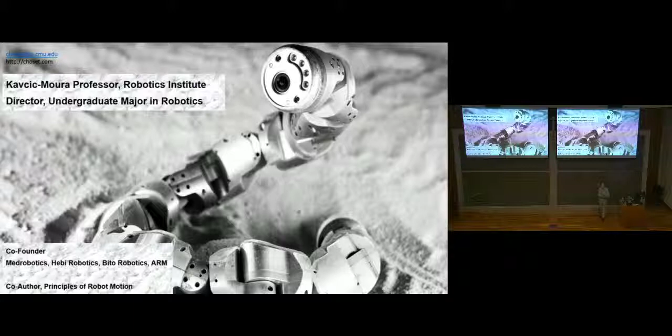It goes without saying that because of my experiences at the University of Pennsylvania, I don't think I'd be here today, and I'm very grateful for the education I received here. I worked in the GRASP lab when it was in two different locations, and through those experiences I'm just very lucky. What's interesting is when I come back to Penn, seeing the new faces, the new people who are here, and there are some wonderful colleagues I've had. So whenever I come back to Penn, it's both a homecoming and an opportunity to see some new people. Thank you again for having me.

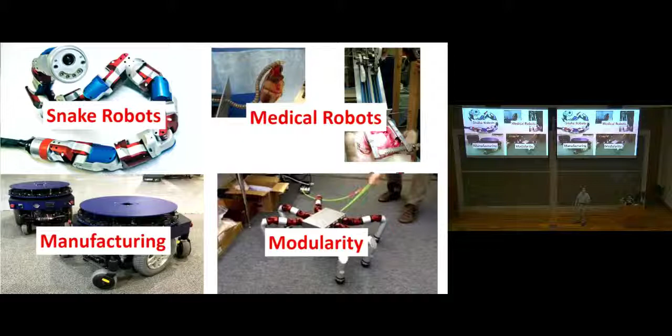My research group, over the last 19 years, has done a variety of things. I think we're famous for these snake robots. We're getting into medical robotics work, and recently some manufacturing as well as issues in modularity, which Mark really set me on that path.

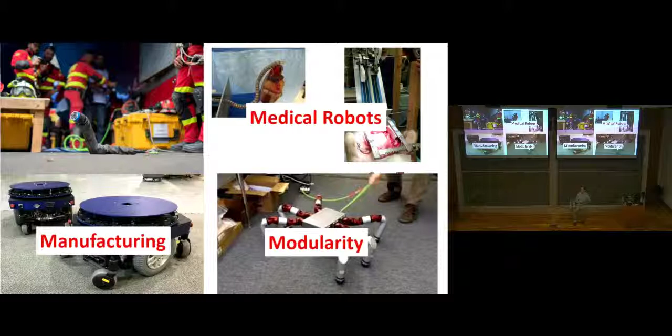What I'm proud of with the work we're doing in all these areas is that we're actually working with some practitioners. For the snake robots, last year we went to Mexico City at the invitation of the Mexican Red Cross and helped clear buildings looking for potential survivors.

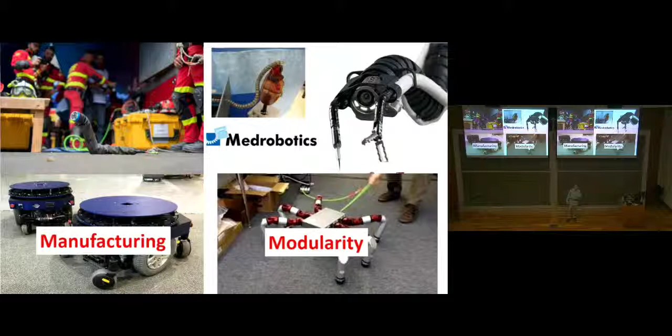In terms of medical work, my students, my collaborators, and I formed a company called Medrobotics that makes this medical snake robot. I should also acknowledge I have another startup making AGVs and technologies to support AGVs, and then there's this other company that makes modular systems. Hebi is the Japanese word for snake, so Hebi Robotics.

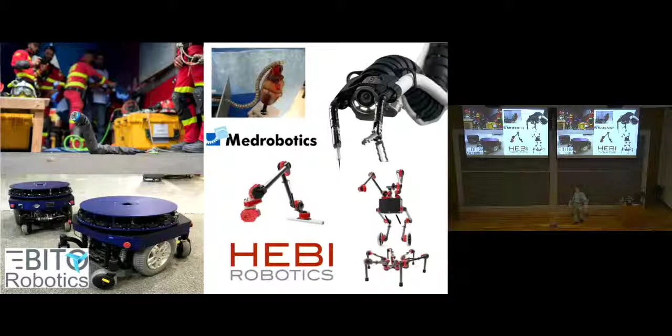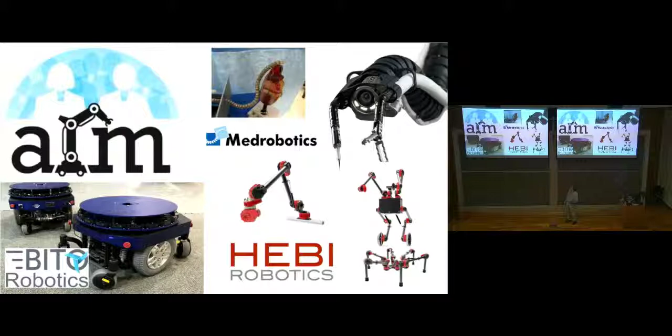And then finally, as Mark pointed out, I was co-PI in putting together the Advanced Robotics for Manufacturing Institute. It's one of 14 manufacturing institutes that President Obama installed, and this one is about a $250 million, five-year endeavor.

The thing is, you don't talk to academics for the applications. You talk to us because of the basic science we develop, and we use the applications to stress test our ideas and make sure we didn't make something up.

Let's start with locomotion for snake robots. Like any good scientist or engineer, you start with Lagrange's equations. If you know what your inputs are, simulating what's going to happen really isn't that hard a problem. It's the reverse that's hard: given you want to go in a certain direction, what should your inputs be? This can be a hard problem for all the reasons of second order nonlinearities, et cetera.

If you make some assumptions—one of them is conservation of momentum, and the other is that if I'm standing here, this is my left, and if I'm standing here, this is still my left—if you make those two assumptions, you can end up with a very simple first order relationship. What I like about this is that we've reduced a complicated problem down to something tractable, something you can play with.

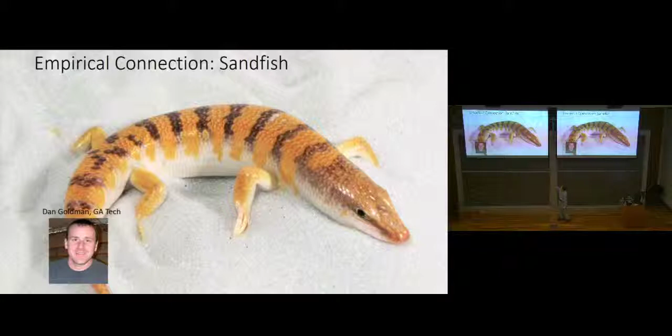And here's where my collaboration with Dan Goldman sort of starts off. So this is a sandfish - it's a little animal that kind of swims in the sand. What's interesting here is that this mechanism, this animal, is interacting with a granular medium. And what we want to do is come up with that relationship, that Jacobian-like relationship, but for a granular media.

And that's something which in the past has been a little bit hard to do. So what we did is we created this robot here.

It has 3 links, and it's in these yellow BBs. And what we were able to do, and this is where the universe was really kind to us, we perturbed for every pair of alphas, for every shape variable, we perturb them, we inject a little bit of velocity into each of these joint angles.

So at a given joint angle, we try one velocity, we try a bigger velocity, and so forth. And after trying this for every combination of velocities and joint angles, we noticed that this linear relationship between our shape variables and our body variables just magically emerges. This is dumb luck. This is the universe being nice to us.

And now what we're able to do is use that linear relationship to derive that Jacobian-like relationship. It's called a connection. And then from there, we can design our 2-dimensional height functions, and we can design our gaits. So in the past, believe it or not, people studied this system—actually Nobel laureates have studied this system.

The best they could figure out was the closest to an optimal system, and that's after days and days of simulations. But with us, within a second, you can see this butterfly shape gives us an optimal step forward.

Here what we're doing is the function you're seeing there—remember that Jacobian has 3 rows, x, y, theta. We're plotting the orientation here, and now we're able to get this robot to orient inside of a granular media. So making it go forward, you didn't need lots of computation.

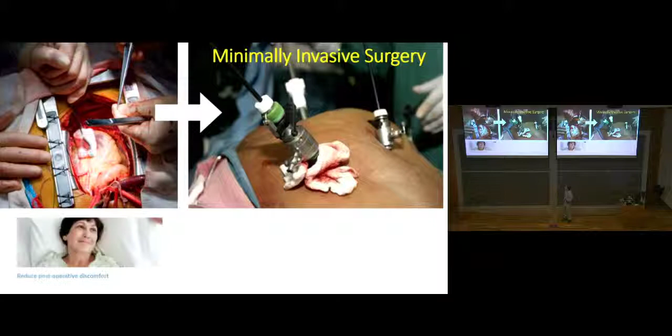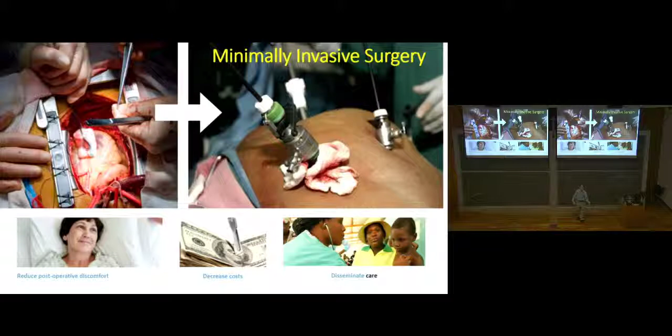It's actually cheaper. And what I'm looking toward now is trying to see how we can have minimally invasive surgery help disseminate medical care and get it out of centers of medical excellence.

The thing with conventional minimally invasive surgical devices is that you're limited to either rigid laparoscopes, so they can only access that which is in line of sight from where the incision is, or you have these flexible endoscopes. They're flexible, but they buckle easily, so you're only limited to the luminal tracts, like your intestines, for example.

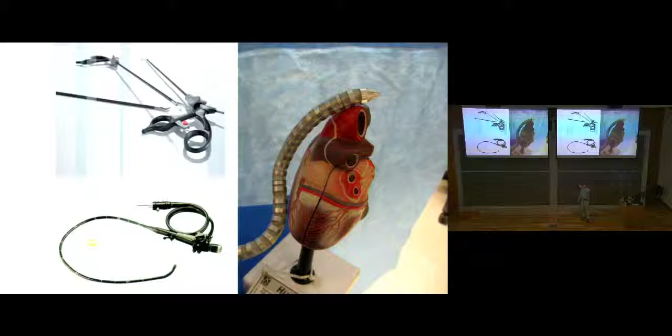What we want to have, or what we have, is this surgical snake robot that inherits the best of both worlds. It's both rigid and flexible, and because of that, you're now able to navigate the cavities, because you can steer your laparoscope wherever you want, or you can ensure your endoscope will get wherever you desire.

So here, this is my clinical collaborator, Marco Zenati. He used to be at Pitt, he's now at Harvard. We're doing minimally invasive surgery on this pig, it's about a 40-kilogram pig. And the idea is we want to do this procedure where we get to the left atrial appendage.

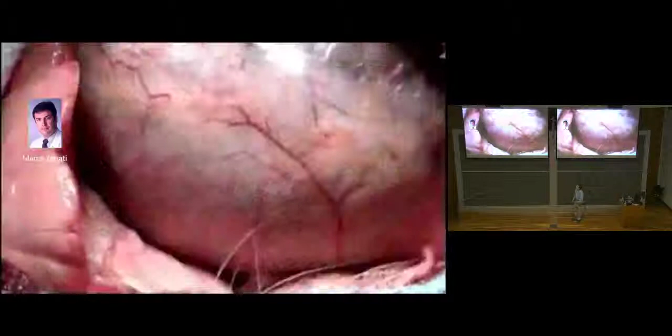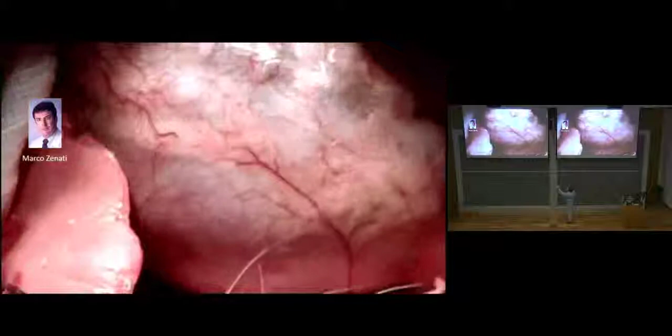By the way, this is not minimally invasive surgery - we just cut it open so you can see what's going on. But you can tell that the snake robot is sailing between the pericardium and the beating heart. Your pericardium is transparent, so here we're seeing through the pericardium to see the snake robot go.

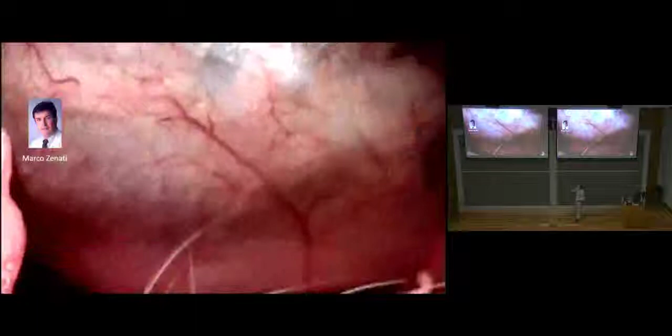So this is nice, but one of the things that Marco and I were able to do was take this technology and really kick it over the fence with the help of one of the economic development organizations in Pittsburgh, and we started a company called Medrobotics. Originally it was called Cardio Robotics, but now it's Medrobotics.

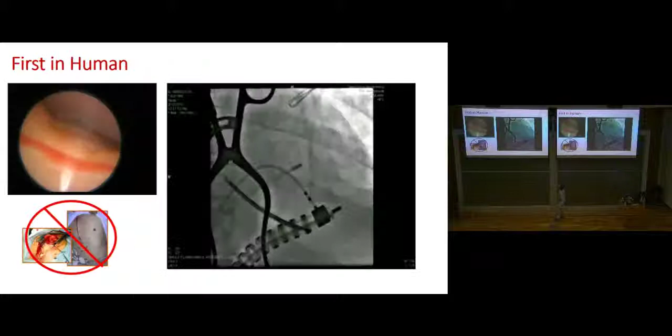And what you see here is a live fluoroscopy of the snake robot wrapping around this woman's heart. This is the view from the catheter, from the vantage point of the robot. So now you see that white - this is white because your lungs are white, except if you smoke, and the pericardium is transparent. So you're looking through the pericardium up into the lungs.

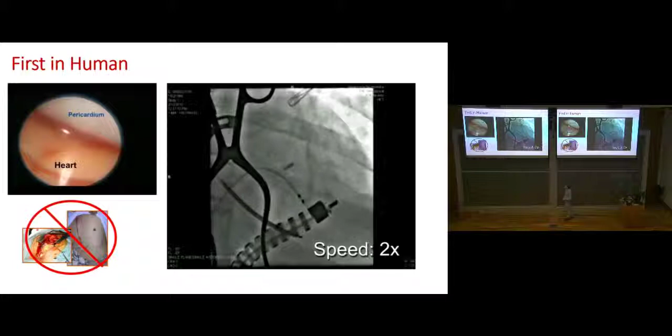And for this procedure, it was a 4.5-hour procedure. And I'm proud to say that the woman who had this, she went home from the hospital the next day. And she didn't have this sternotomy, this full cut. If she'd had that sternotomy, she would have been in the hospital for 14 days, okay?

What's funny is after the operation, I flew back to New York, I called up Marco, and I said, hey, it was a success. And the first thing he asked me was, did the patient live? And I just couldn't get that - I was like, of course the patient lived. I wouldn't be excited for one thing, but...

These aren't experiments - you really have to go through a lot of safety protocols. The next question he asked was, did the patient experience any hemodynamic compromise? And for me to explain what happened, my heart is suffering more than what her heart suffered having my robot go around it. So it was pretty nice.

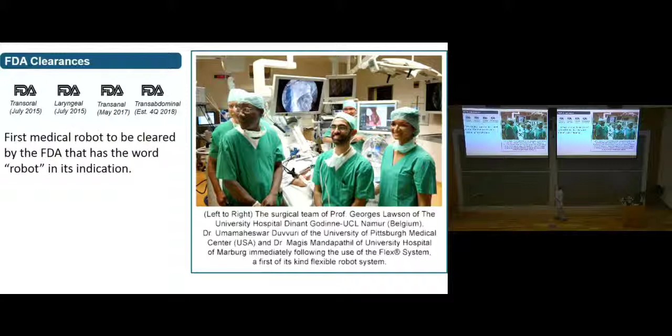We got the CE mark, and of course we cleared the FDA. We're the first medical robot to clear the FDA with the term robot in its indication.

If you look at Intuitive Surgical, the word robot won't appear. And there's been all sorts of cool successes. Last year, an Australian surgeon removed a 6-centimeter tumor out of someone's neck. 6 centimeters, not millimeters. So imagine the quality of life change.

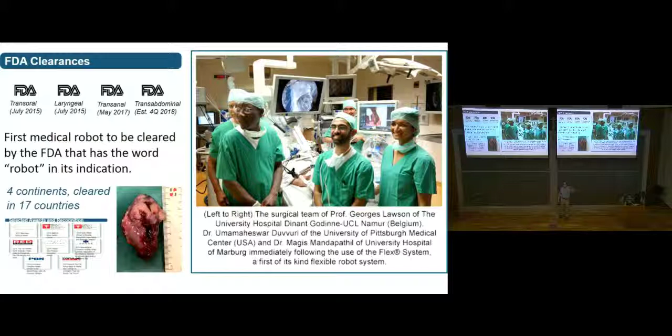The thing is, let's go back to this first in-human procedure. Here's Petter. He's driving this joystick, and he's looking across the table. On the other side of the table are these 6 monitors. With these 6 pieces of information, he's trying to figure out what's going on. What's the situation? What's the situational awareness? So he has different modalities, and in his mind's eye, he has to fuse it together. And this is what doctors do today.

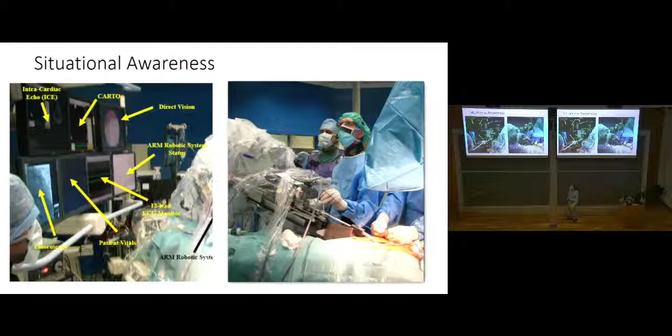What we want to do is almost make it like a game, a video game, or something like the movie The Matrix. And here we have a heart that was CT'd the night before. We have some fiducials that we're using to help navigate. And we can now, in real time, create this image, which is nice.

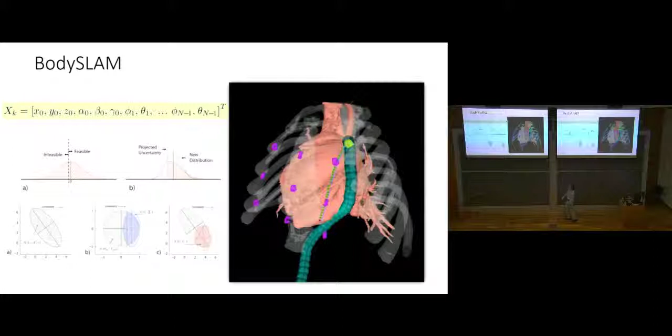The contribution here is that it's a straightforward Kalman filter, except that we're doing something a little clever about the constraints, because obviously the snake robot can't go into the heart. If you know that, you can project your estimate distribution onto the constraint, renormalize, and then you have a better estimate. The thing about this particular experiment is that we made a strong assumption as to where we knew the base of the robot is. We had low uncertainty. In practice, again, that's not necessarily realistic.

So the kind of problem that we're thinking about now is registration when you have high uncertainty. How can we find a correspondence between what I'll call this CAD model, this preoperative model, and some live operation? What's the transformation, the rotation and translation? To do this, it's a highly nonlinear problem, and we kind of backed into this.

We ended up using something called a dual quaternion. In the robotics world, quaternions are a way to measure rotation. It's a 4-vector, 4 numbers. A dual quaternion is a pair of quaternions, just like a complex number is a pair of scalars where i squared equals -1. A dual quaternion is a pair of quaternions, Q1 plus epsilon Q2, where epsilon has the property epsilon squared equals 0.

It's worth noting that we derived a principled way with which we were able to decouple rotation and translation with this dual quaternion framework. We actually thought we were the first to have done that, and we looked real hard, but it turns out Marcel Liber in the early 80s did it too. But his paper was typed up on a typewriter, and then it was scanned in, so we couldn't search for it.

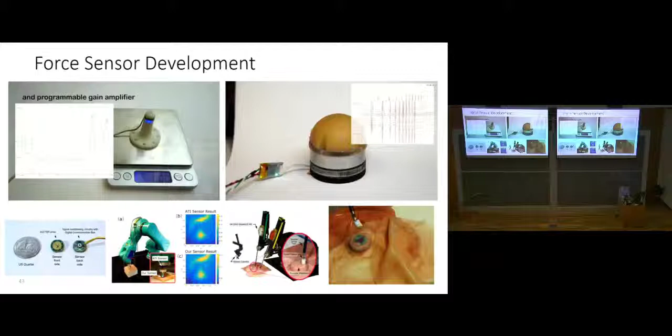So I just want to take a quick sidestep to note that my research group spent quite a bit of time developing all sorts of force sensors that have incredible variability. You can see over here, he was hammering this as well as rubbing a feather against that force sensor, and it's something we're pretty proud of. Of course, we're going to put it on our robot feet, and here's a version of that force sensor for the Da Vinci medical robot.

So the problem we'll talk about now is the simultaneous compliance and registration problem. I know what you're thinking, it's SCAR, which is not good for medical robotics, but neither is the word killer application. If you have your registration, figuring out the compliance model isn't that hard. If you have your compliance model and some geometric understanding, figuring out the registration also isn't hard. It's this chicken and egg problem that we want to solve.

And the way we do it is, just looking at this picture, this is the ground truth of what's going on. We have this silicone thing where there's an artery inside of it, and as we're moving through, we're palpating that artery. This is what the ground truth is, so it doesn't change. You can see the pokes that we're doing.

And then over here, what's happening is as we palpate, we do have some geometric information in the CAD model. Our geometric registration pops up really quickly, and then as we continue, we're also getting our stiffness map. So we're able to get a registration for the geometry and the stiffness map at the same time.

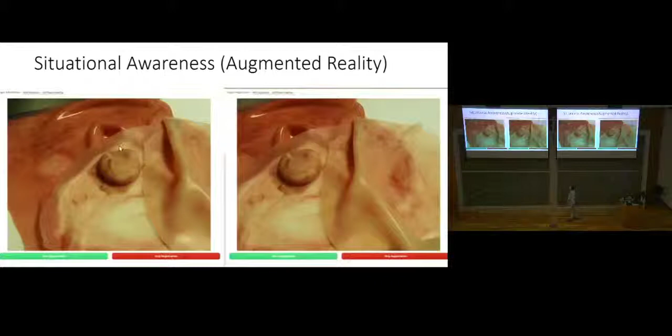And this work we're now using to go look for bad guys and gold and other things that people have to look for. In this video here, we're sort of tying the whole thing together.

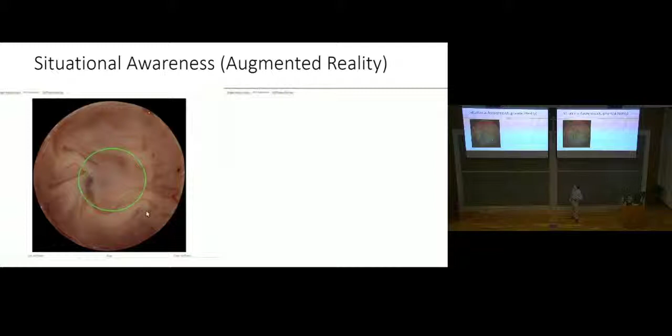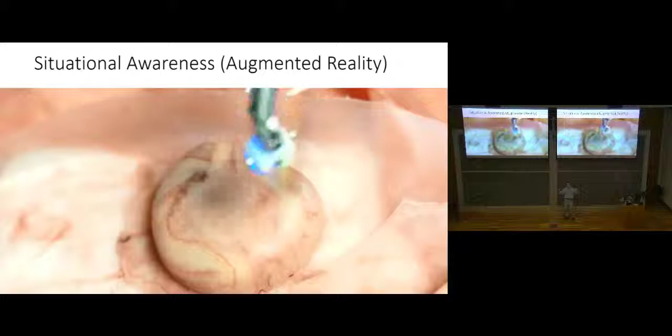It's this left and right, this is from the Da Vinci kit again. We're seeing how the surgeon selects, in this case the prostate, and then automatically we segment the image. Now the robot's going to come down and start palpating with the force sensor that we developed. After a couple of pushes, it'll have this 3D model that also encodes the compliance information. So not only can you whiz around and look at it at any possible angle, if you care to interrogate this model, you'll know how hard and soft things are.

So this notion of compliance, I'm going to change subjects again. This notion of compliance runs through not only our estimation work, but also our controls work. It's funny, this orange one is a KUKA robot, and we have these biologically inspired robots that we like to send out into the field. But the truth is, we kind of program these biologically inspired robots as if they're industrial robots.

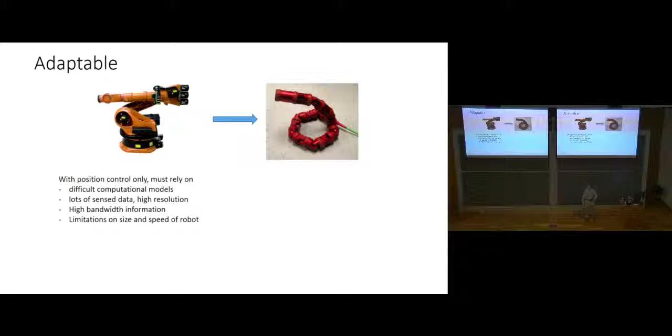And we don't want to do that, because in order to go through especially a scene like this where everything is totally unmodeled, you can't plan very perfectly every path. You need some sort of compliance built into your system, just the same way when we walk, we don't figure out exactly where to place our foot down. We have an approximate idea, and we let the compliance of our muscles do the rest.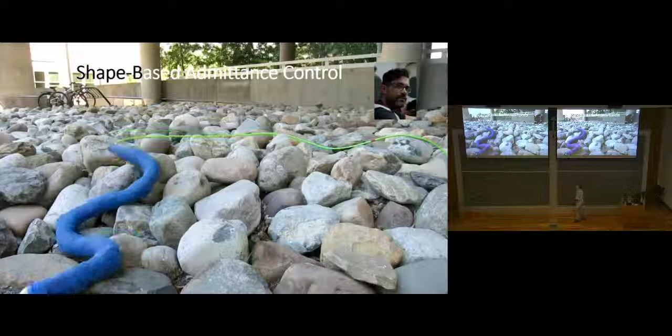You can see in this example here, we were able to put this robot on a pile of rocks. It doesn't know what the rocks are. We give it a nominal gait to follow, and now in order to adapt for these vertical imperfections, it's running an admittance controller in the parameters that describe the gait, of which there's only two, because we like two-dimensional basis functions.

In our work with Dan, we were able to characterize two kinds of snakes. It turns out there are some snakes which are specialists, and others which are generalists. In my view, the specialists are those old kinematic robots we were talking about—the snake just does the same thing no matter what environment it's in. Maybe it evolved some special capability for a particular environment, but take it out of that environment and it's not going to change its gait. Whereas the generalists are able to use this admittance controller, again in my words not what the biologist would say, in order to move through unmodeled terrains.

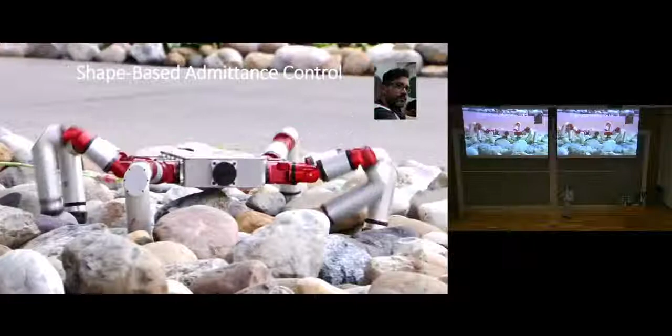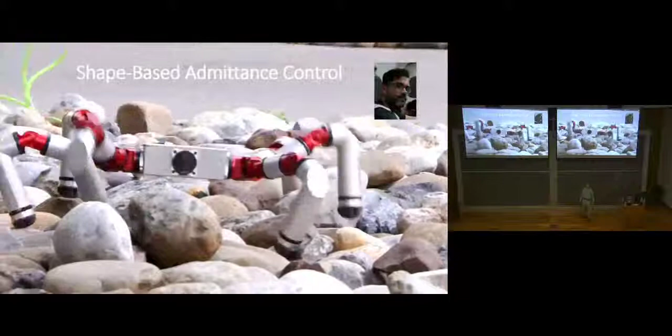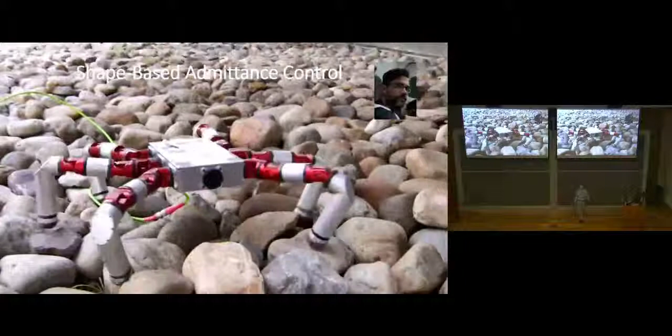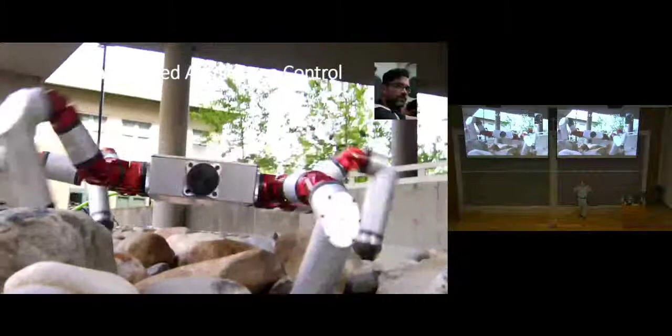I want to point out that we've also taken the same gait design rules for legged systems, and we implemented this admittance controller again on one of these robots. Now, one thing I forgot to point out is that these joints you see are what's called a series elastic actuator. So what you have is this joint, a motor, and on its output there's a spring, and the output to the spring is the output to the system. If there's no load, everyone spins together. If there's some load, then there's a torsional deflection, and from that deflection you can infer how much torque is being exerted onto the mechanism.

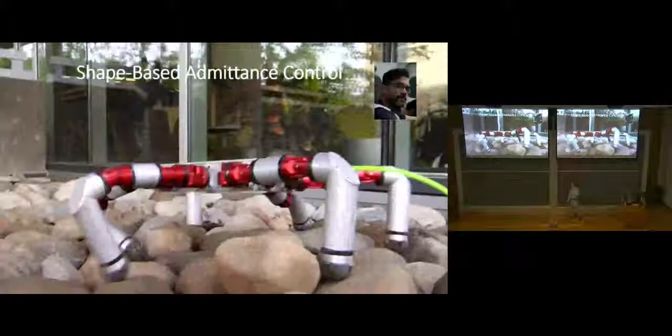So we use that information to close the loop in the admittance controller, either for the snake or for this kind of robot. And then here, I'll skip this because we started using CPGs, and I don't want to talk about it.

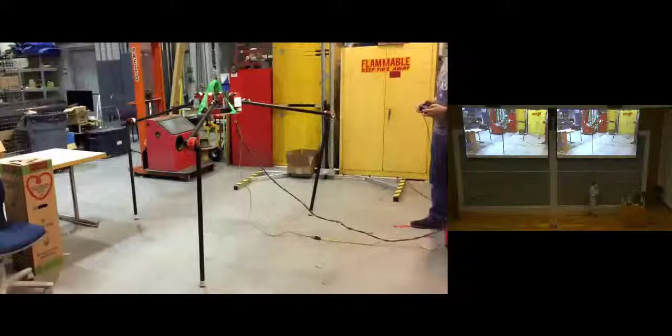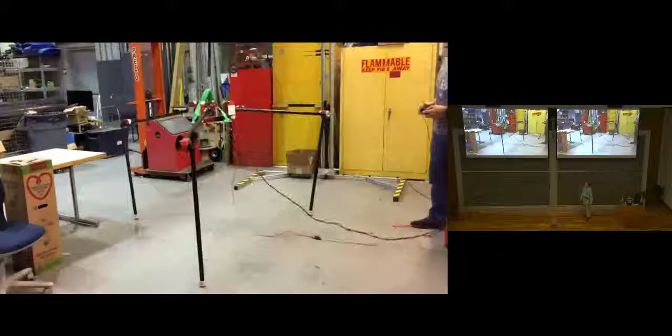The next thing we're building is this—we're actually going to build a 6-foot-tall robot. This is the second version of it. It only has 3 legs; it's going to have 6 pretty soon. And the idea here is, can we use the compliance to damp out? Here we want to damp out compliance as opposed to use it for walking over spaces.

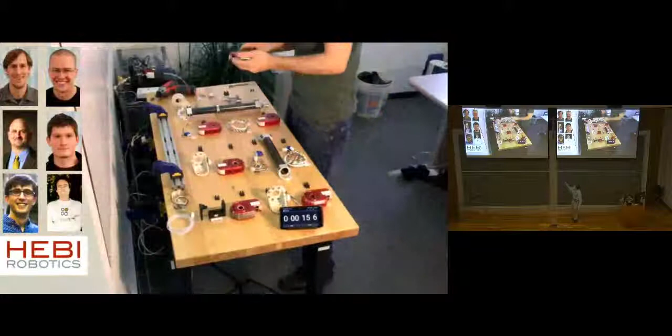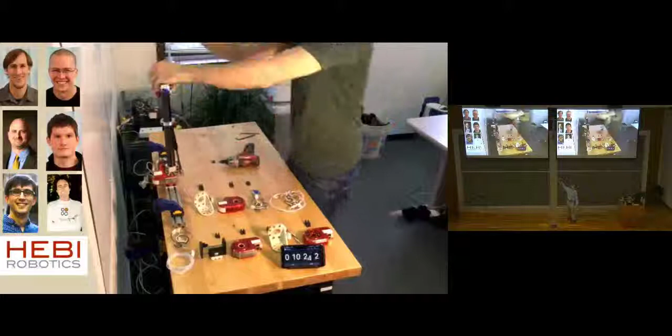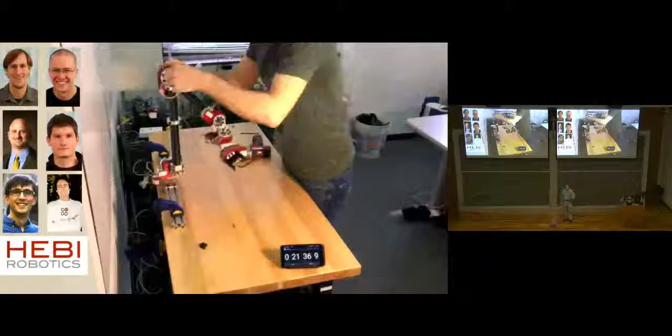Those modules that you saw in that robot—my students and I started this other company called Hebi Robotics, the Japanese word for snake, and we focused on the modularity here. One of the things we discovered about modularity is, yeah, we can build other kinds of robots, from snakes to legged systems and what have not. But the real discovery, at least what I found exciting, was that we're able to build good robots really fast.

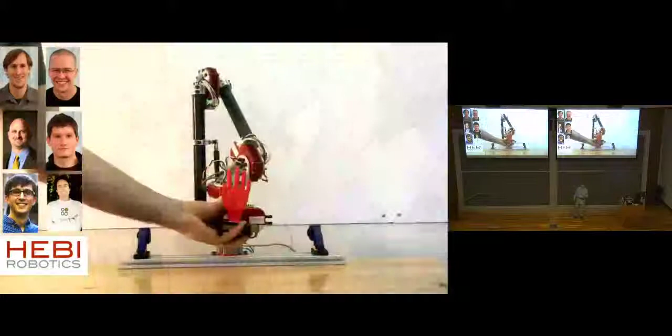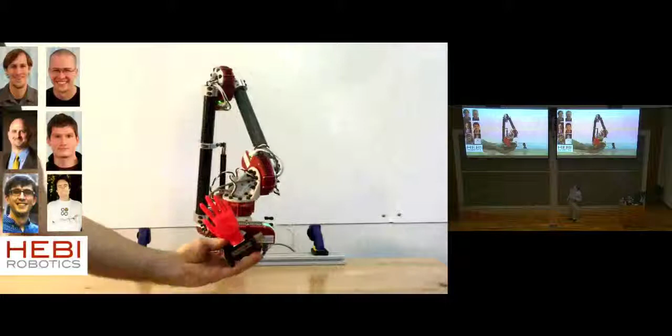So here we built this robot arm, although not at the quality of an industrial robot, but we were able to build it in less than 25 minutes. The idea is, if you believe the future of automation is mass production in quantities of one—low volume production—if you want to adapt your automation every day, you're going to have a system like this that will allow you to change, program, and customize your automation every day.

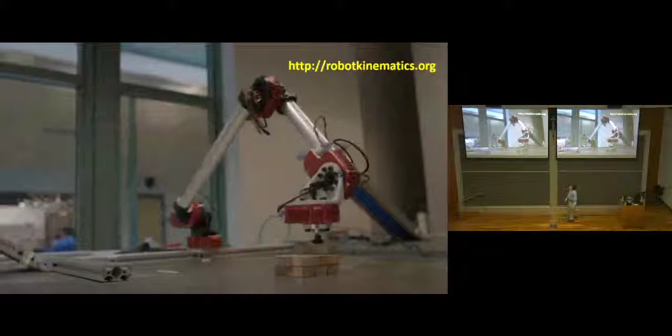This is one of my classes that I teach, and they have to program robot arms, and then the final programming assignment is they have to build these Jenga towers. There's a lot of lessons I was able to more effectively teach because we had access to these kinds of modules. The one up here is feeding people.

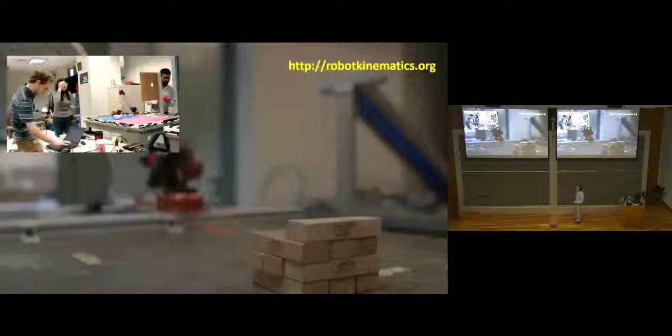There was a contest—you take a bunch of BBs and put it in someone's mouth. We didn't have it feed me or someone else little M&Ms, because the students figured out very quickly, since time counts, they started doing things like this really fast, and I didn't want to get hurt.

Okay, so let's talk about this last topic, then we'll finish up. So this is related to the multi-agent work that my group is doing.

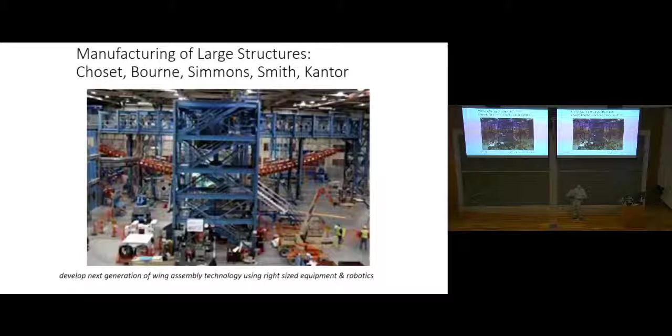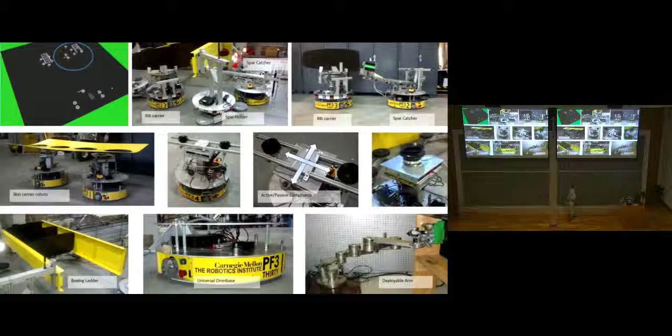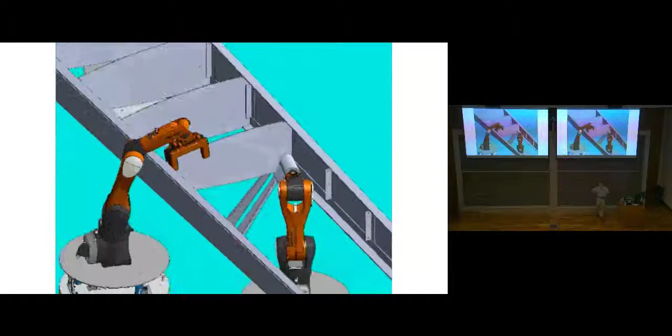We had this project with Boeing, and the idea is they want to be able to assemble planes. The problem with assembling planes is you have to lay down a lot of fixed infrastructure. So instead of taking the cost and time to lay down fixed infrastructure, they had this vision of magical mobile robots running around assembling things. So they came to us, and we were able to conceive of what these mobile mechanisms, these mobile manipulators, should look like. My group focused on the mechanism design aspect, but we also focused on the processes you might be able to develop because you no longer have this traditional way of doing manufacturing. Can we change the manufacturing process?

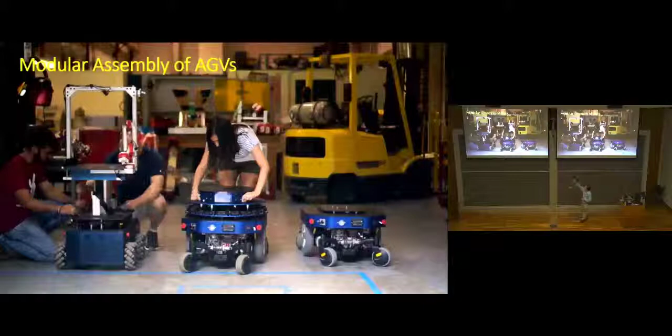Now, one detail in all this - we built the mobile robots, and this is just showing that we have nice modular mobile robots that drive away. But since I'm running out of time, I'm going to skip to this.

One of the problems, at least I found interesting, was multi-agent path planning. The idea is you want to plan a path using, say, A star from start to goal. For one robot, it's yay hard. 2 robots, twice as hard. 3 robots, 8 times as hard. 4 robots, 16, et cetera.

It grows exponentially. So what we did is we came up with a technique where if you let every robot plan for its own path and only locally construct your configuration space when robots come into proximity of each other, on average, you can beat this exponential growth. In fact, for this algorithm, for this demonstration here, it's 200 robots going from start to goal. There isn't enough computation on the planet to plan even one step forward in the path planner, let alone find the path.

So we're proud of this result, and we have this other thing where teams get together to carry objects. It's actually easier because it's now 1 robot, not 3. And we're happy about this growth, but the truth is this is a centralized planner.

One of the things we want to do is try to get these robots so they can just fend for themselves without having to know what everything is going on. So I know, for those of you who know me, my inner self is now mad - I don't know - we embraced reinforcement learning, okay?

With this reinforcement learning, these robots are trained, and now they can just look in a vicinity - once the policies are trained, they look in a vicinity of each other, and the right thing just happens because of this training. The thing is, we didn't just use, the truth is, what's the secret sauce?

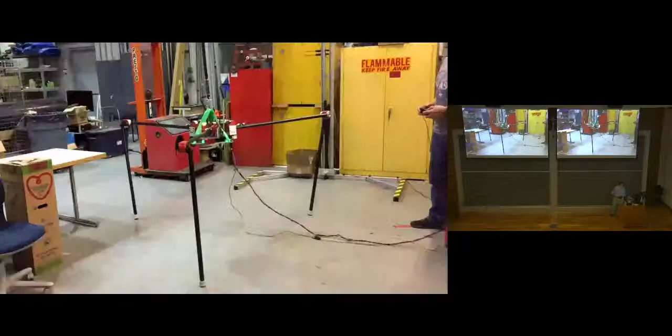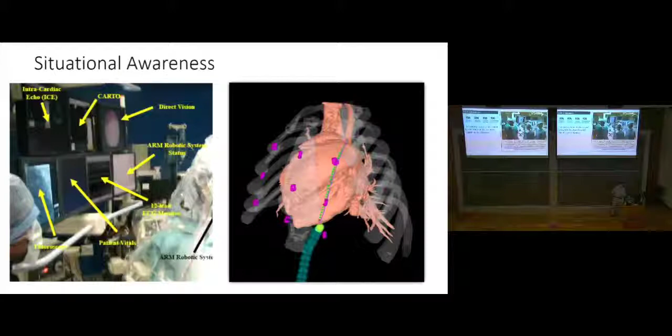Okay, so in that picture, if we go back in time, all the way back in time, she had what was called an arrhythmia. And an arrhythmia means that your heart is not beating properly, it's going at the wrong pace. And the reason why that's a problem is blood will then start to pool in your heart and clots will form. So you really want your heart to beat at the right rate.

You don't want to get a sternotomy.

So with an arrhythmia, the first thing you try is you enter through the femoral vein, go up into the heart, and from the inside you do what's called an ablation. The reason is your heart is not only a muscle, it's a conductor, and sometimes if you electrically isolate the 4 pulmonary veins surrounding the heart, the heart starts beating right. How they discovered that, I don't know.

So with people whose hearts are in arrhythmia, you enter through the femoral vein, go up, and start burning from the inside in hopes of forming lesions to electrically isolate the 4 pulmonary veins. The problem is it's the outside of the heart you want to burn, so from the inside you're just approximating, not really getting the burn. Unfortunately, 50% of these cases have to be redone. And 2% of the time, you actually accidentally kill the person because a clot forms during the burning and they die.

This woman had multiple intracardiac interventions and nothing was working. So she volunteered to get the ablation done from the outside.

In her case, we still didn't know where the electrical connection wasn't working. So the first thing we had to do was an epicardial mapping, where we take this probe and poke all these points on her heart to get an electrical map. That's something you couldn't have done from inside—it has to be done from the outside.